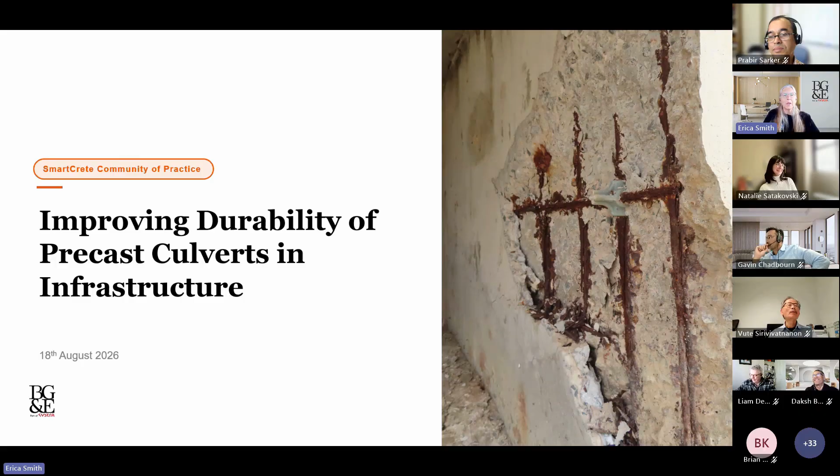So a few gory pictures and a little bit of background from me. The problem: precast concrete culverts form part of essential transport infrastructure. They often deteriorate in service, however, before their expected design life. Older concrete culverts were generally cast in situ, and many suffered from cracking and spalling due to lack of concrete cover, ingress of moisture, and other environmental aspects.

Newer precast concrete culverts are generally more robust and perform well, but there are still some reinforcement corrosion problems, particularly in the salt-affected areas of WA, which is where this project concentrated its effort. In addition, once you need to do some repairs, it's a little bit like putting a Band-Aid on it. Concrete patching or crack repairs can be quite successful in the areas you're looking at, but then other areas fail due to general dampness through porous concrete or lack of concrete cover.

So the causes of deterioration can be many and varied, and I'll go through some of those in my slides. But as I say, Curtin University is looking into some possible causes of that.

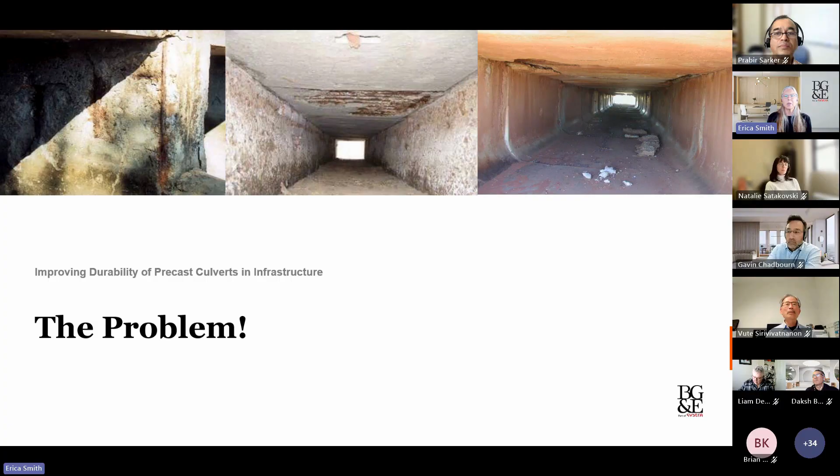BG&E's involvement: we value the opportunity to contribute to SmartCrete and the university research. We commenced this project back in 2021, forming the scope and the ideas behind what has emerged over the subsequent years. We're an industry partner on this collaboration, and basically what that means is we stump up some money for testing, transport, materials, those sorts of things. We contribute hours for asset management specialists, so that could be structural engineers, material specialists, technical officers. So it's an in-kind contribution.

And we also provide those valuable connections to what I would term real life. In this case, predominantly to Main Roads' Wheatbelt region in particular, but also some of the concrete manufacturers as well.

Before we get too far, I figured that we should make sure we're all on the same page regarding what is a reinforced concrete box culvert. Engineers aren't that... don't have a great way with words. We talk about a box. Well, it looks like a box, right? This is taken from Main Roads inspection guidelines and shows the various components of a box culvert.

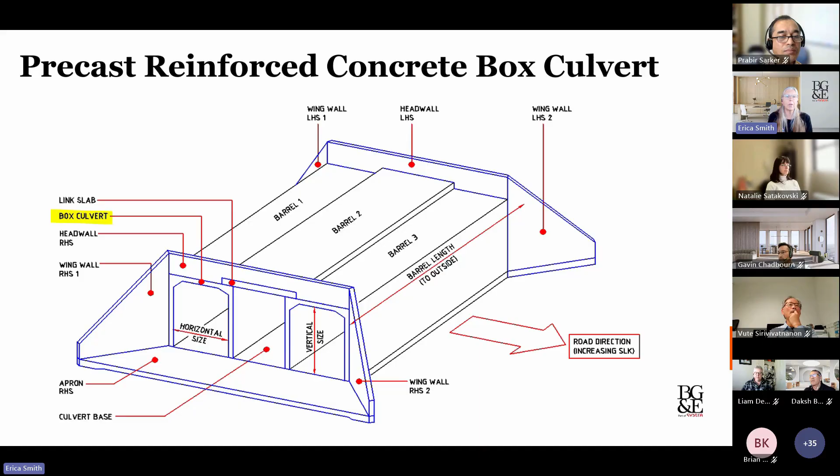The ones that we're talking about today and as part of the research are the precast reinforced box culverts. So there's barrels 1 to 3 here in this 3D visualization.

What is a culvert? It's a buried structure that transfers something. That something can be things like water, stock, pedestrians, or other things. And it carries something over the top, and again that could be anything like vehicles, trains, pedestrians, or whatever. It's also designed to safely resist the earth pressure.

In WA's world, a box culvert is defined as a structure having clear openings of less than or equal to 3 metres. If it gets bigger than that, they term it a bridge, and it's treated slightly differently in the vehicle permitting and asset management side of things for Main Roads WA. And obviously a box culvert is shaped like a box. Not too hard to understand.

Culverts are an important component of any road network. Compared to bridges, culverts are smaller and might be considered less critical. They're buried beneath the road embankment, often sight unseen. However, failure of culverts can be a hazard to traffic, and excessive settlement or collapse can result in closure of the network. So they still constitute an asset that is subject to deterioration, and they must be managed appropriately.

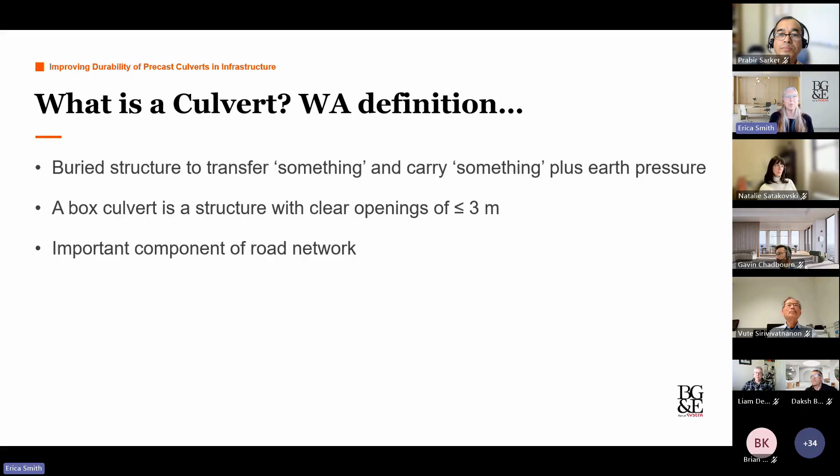The size of the problem - the state of WA is pretty big and has nearly 186,000 kilometres of local and state roads. Main Roads WA looks after about 19,000 kilometres of those, just over 10%. There are nearly 28,000 culverts managed by Main Roads, so we have some decent records on that within the state. That equates to about 1.5 culverts per kilometre on the Main Roads network, or if you flip it the other way, about 1 culvert every 680 metres.

Of those 28,000 odd culverts, 7,000 are what we're talking about today, which is precast boxes. So still a very large number, and that's just on the Main Roads network. We don't really have a good indication of the total number of culverts in WA, but it's obviously far higher than that, because you have culverts used for rail and roads managed by others, whether that's mining resource organisations, water corporation, local governments, and so on.

For Main Roads, because we've got a bit more information about them, the total investment in their culvert structures is considerable, and it's comparable in value to that for bridges. The proportion's likely to be higher for other asset owners because they generally have smaller structures in their bridge stock.

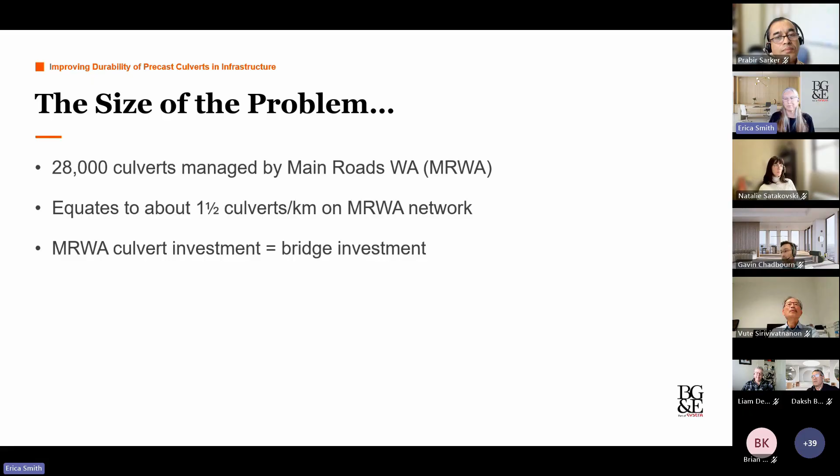Just having a look at some of those defects that I alluded to before. Defects in concrete are often related to lack of durability, resulting from composition of the concrete, poor placement practices, poor quality control, insufficient curing, or it could just be the environment, which is more aggressive in which it's placed.

Cracking - everyone recognises that reinforced concrete cracks, and there will be some cracking, but it's those cracks that are bigger than hairline that matter. Hairline is considered less than or equal to 0.1 of a mil. They may be considered harmless structurally, but we still need to look at those because they may open up and progressively spread to longer and wider cracks and then become a durability issue.

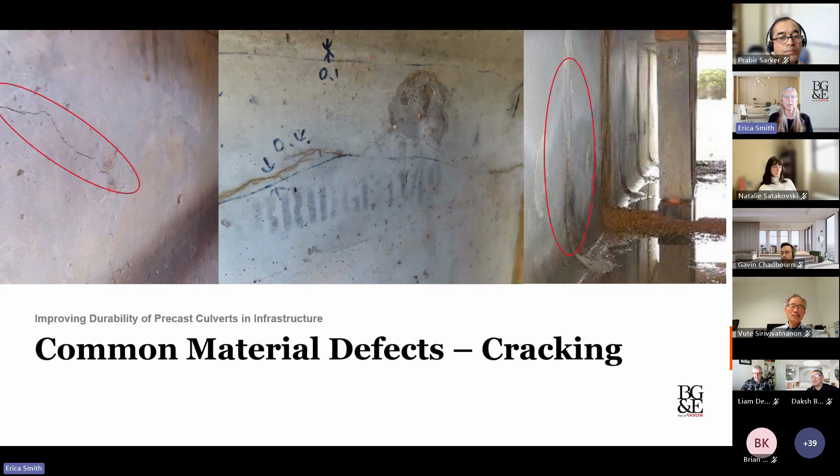Corrosion of reinforcement is a big issue, particularly in the saline environments of the state and the wheatbelt areas in particular. Concrete alkalinity protects the reinforcement from corrosion, but when moisture, air, and/or chloride ions above a certain concentration can penetrate through the concrete to the reinforcement, this protection breaks down and corrosion commences in its initial stages.

It may appear just as rust stains, as you can see on the left-hand photo here. But then the expansive nature of the advanced corrosion to the reinforcement is in the order of 4 to 6 times its original size. So what happens is you then get cracking, delamination, and ultimately spalling off of that concrete, and then you get a heavily corroded reinforcement that's no longer protected from the environment. These are some photos here of culverts throughout the state, predominantly in the wheatbelt and WA.

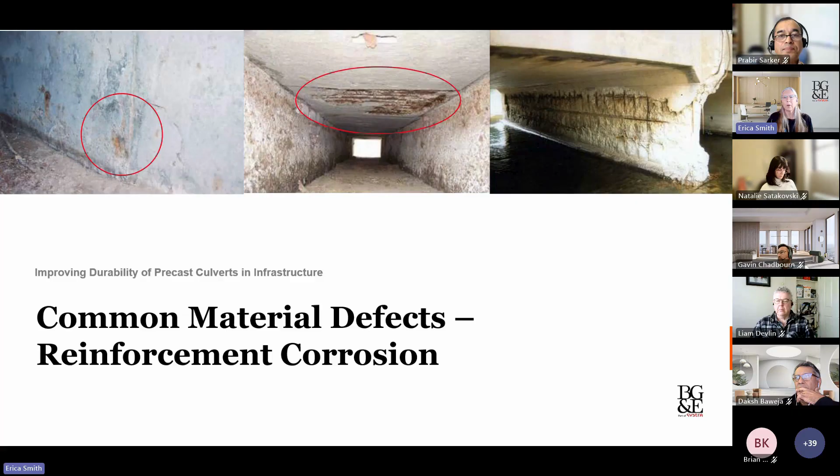Another one I wanted to show you was spalling. Spalling is just a fragment which has been detached from a larger concrete mass, and you can see a couple of examples here. It's usually a continuation of the corrosion process, and it represents a serious defect because it exposes the reinforcement, and you've now lost your cover. There are other material defects which I'm not going to go into a lot of detail today.

Things like delamination, where you have a discontinuity in the surface of the concrete, just before you get the spall. You can usually tell that you've got delamination by whacking it with a hammer, and then you get a hollow sound behind.

You can see areas of dampness, and that might be a sign that you've got an indication of moisture penetration through the concrete. It may eventually lead to corrosion of the steel. It may be nothing, but it should still be looked at.

Scaling is localized flaking or loss of surface of the concrete, usually to a small depth. That's prone in poorly finished or overworked concrete, where you have too many fines and not enough entrained air near the surface. It can be superficial and usually doesn't extend to the reinforcement, but it may again lead to reduction in overall durability because you've lost that cover concrete.

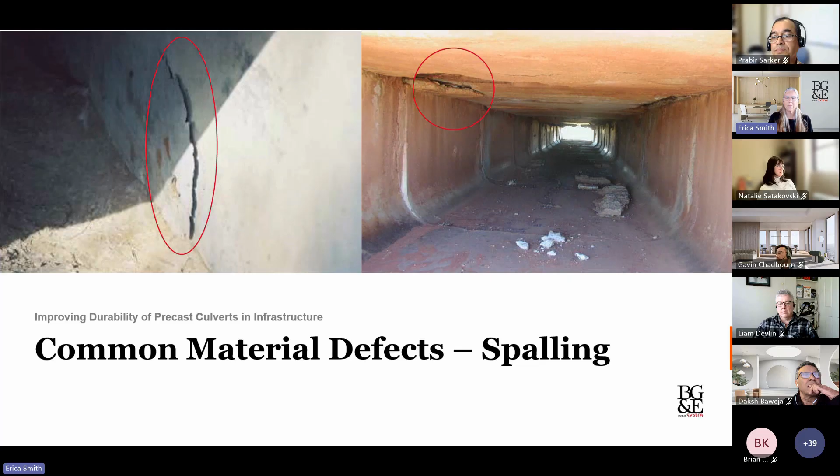Then we have some defects that are generally related to the culvert site rather than specifically the box culvert barrel itself -- things like scour, vegetation, debris, drainage, movement, settlement. These aren't really considered as part of this study at all, but loading has been. So loading is another thing that can cause defects.

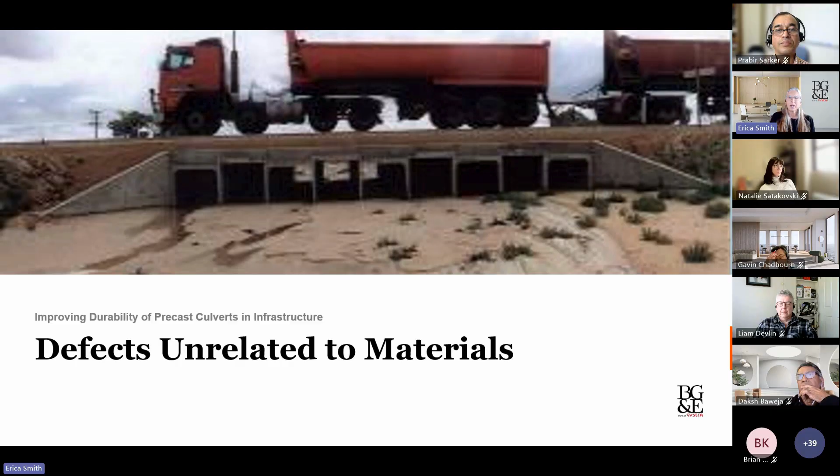During construction, it's important to make sure you don't overload a structure as you put the backfill in, but also in service. So impact overload at the slab edges, or where you have limited cover, are issues that may affect these precast box culverts. Comparing theoretical load carrying capacity to actual, as well as the failure patterns, is also being looked at by Curtin.

So that's it from me. Hopefully that helps to set the scene a little bit and explain the problem and the size of the problem. It's fairly large in WA and throughout the world in terms of culvert structures and durability.

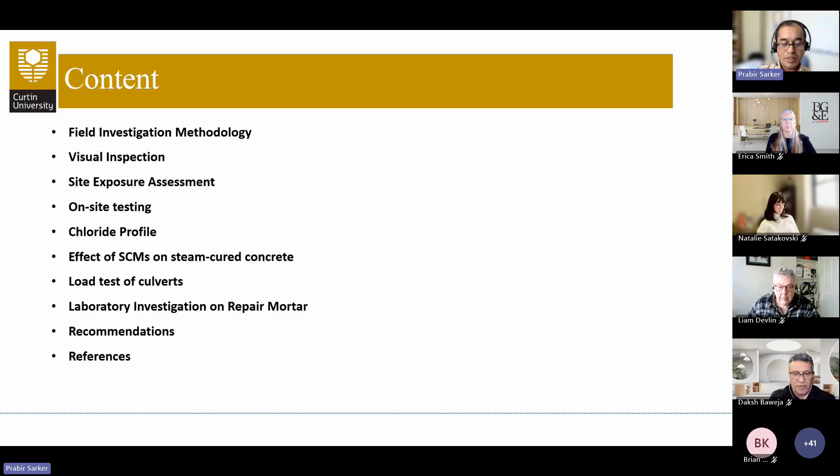So these were the subject of the 3 HDR students. I acknowledge the hard work of the students that have put on this project, and if I cannot answer some questions in detail, I will need to ask them. We have Atauz Zaman and Chinmoy here today. Shaugat is not around because Shaugat is traveling.

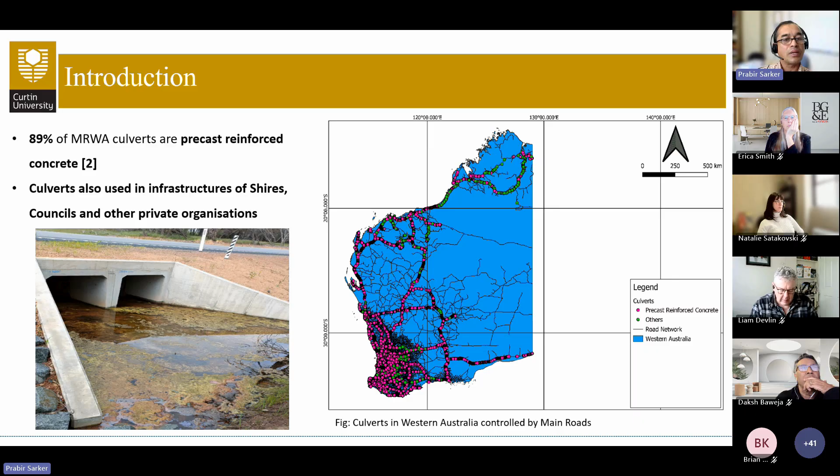The field investigation started with 1,400 visual inspection records that Main Roads Western Australia had, to understand the majority type of deteriorations, the common defects as Erica mentioned: corrosion, concrete spalling, delamination, erosion, and scaling.

From there, 53 culverts were identified with discussion with BG&E, and we observed the deterioration in more detail. We collected the level 1 inspection reports from Main Roads to look at more details into those.

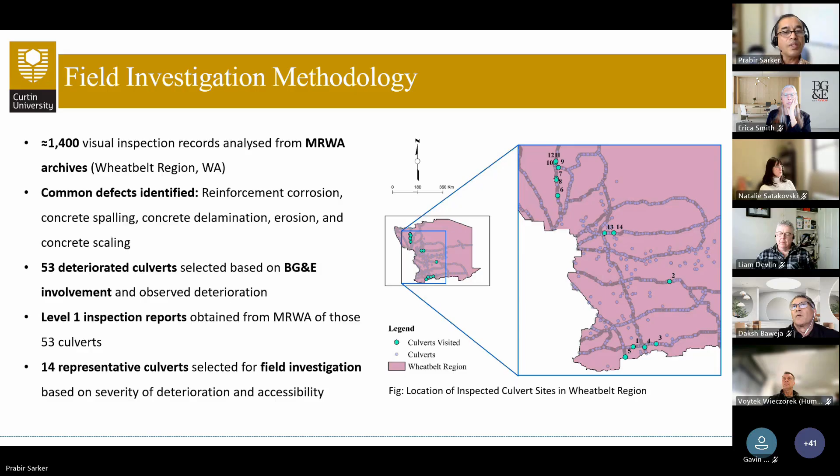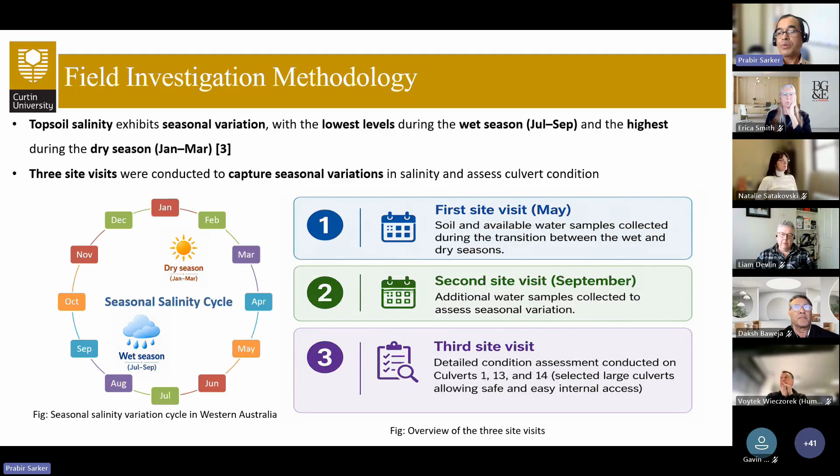So what we did is go to the site 3 times, because the water in the soil varies seasonally. We went once in May to collect soil and water samples and do visual inspection of the culverts. The second site visit was in September, and the third was done in a dry season on 3 culverts, 1, 13 and 14, to do detailed investigation using on-site testing and also to collect core samples to test in the laboratory.

Visual observation shows salt-tolerant plants at many sites, which is an indication of high salinity, because these plants thrive in high saline soils and waterlogged conditions.

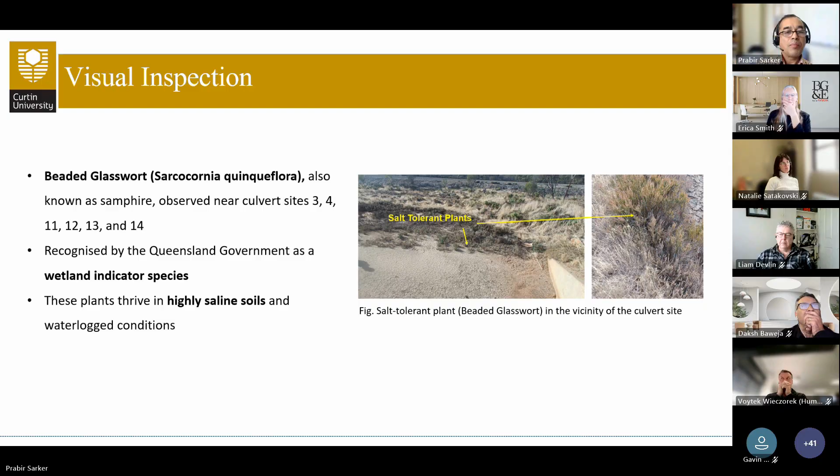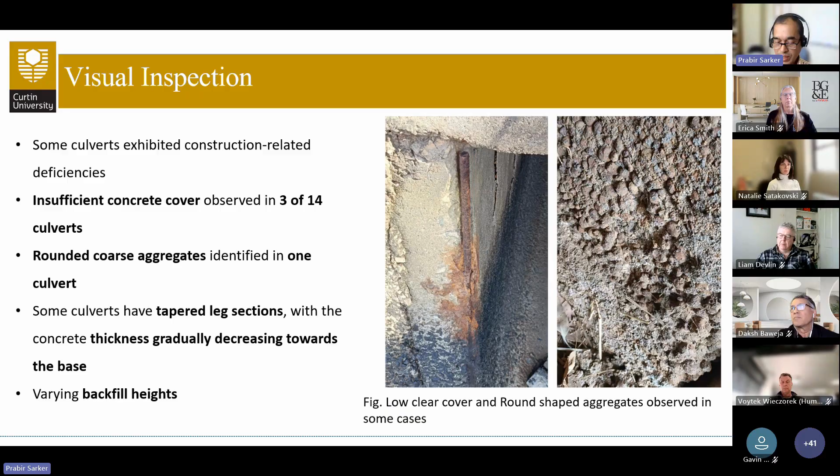Some culverts had tapered legs, tapered at the bottom, so the thickness of the culvert leg was high at the top but less at the bottom, gradually decreasing towards the base. Also the backfill heights in culverts varied; in some culverts backfill height was very small, which can affect the load distribution of traffic to the culvert.

This shows some of the deterioration that Erika already showed, so I will not go through this again. These are just photos taken from the inspection of the sites.

Now the site exposure assessment based on the test results of soil and water collected from the sites, using a pH meter and electrical conductivity meter. Soil pH ranged from 6 to 9, indicating an alkaline condition.

The WA government's industries and regional salinity classification recommends salinity classes: high for values from 58 to 114 millisiemens per meter, 115 to 228 indicates severely high saline, and extremely saline is higher than 228 millisiemens per meter. On the right-hand side diagram, we can see 7 sites out of 14 inspected categorized as extremely saline sites.

So we can see salinity, this is based on the electrical conductivity in millisiemens per meter. pH of the water ranged between 7 and 7.5, indicating alkaline condition as well. Water collected from the site was tested for electrical conductivity, ranging from 2,230 to 8,600 millisiemens per meter, showing again extreme saline condition. Both soil and water tests indicated extremely high salinity in almost half of the sites we inspected.

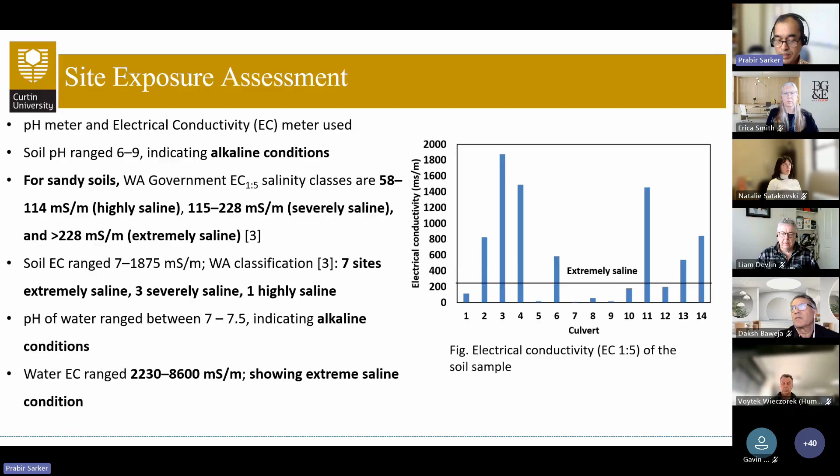Soil and water samples were also tested for sulfate, magnesium, and chloride contents in the chem center. The results were used to classify the exposure condition according to AS 5100.5, and it was found that 9 out of the 14 culvert sites were classified as exposure class C, which is C1 and C2, as we can see on the right hand side diagram.

Water with up to 6,500 ppm sulfate and up to over 3,000 ppm magnesium was found. Chloride concentration was very high, up to 83,700 ppm, which is approximately 4.5 times the chloride content of seawater. So some of the sites had very aggressive conditions in terms of sulfate, magnesium, and chloride content.

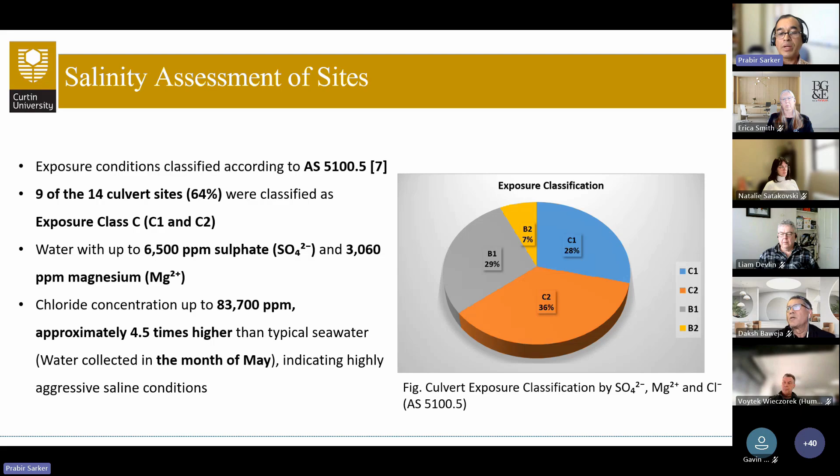Then in the detailed third inspection, we went to the site to do some tests for carbonation and electrical resistivity. The carbonation depth was measured on core samples, which were collected from the good areas of the legs where there was no obvious deterioration, because core samples couldn't be collected where there was already spalling or delamination. Carbonation depth was tested by spraying 1% phenolphthalein solution.

Higher carbonation depth was found at the top of the culvert legs, and minimal carbonation was found at the bottom of the culverts. The reason is the bottom part had high moisture saturation at the base, which limited carbon dioxide ingress.

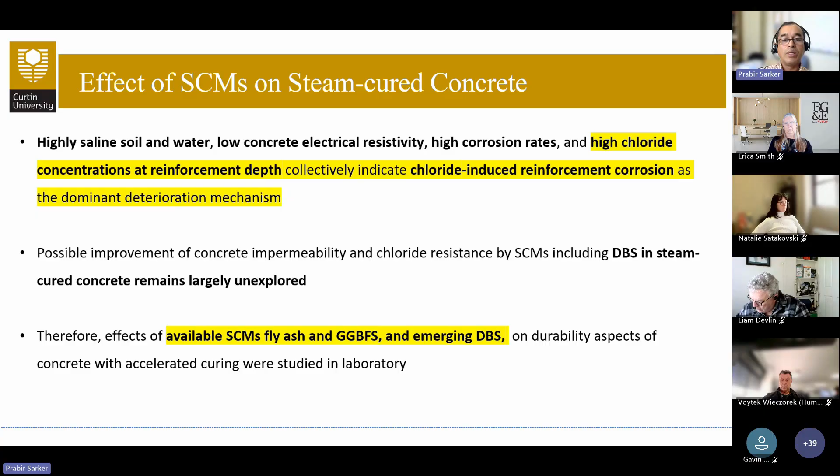So we looked at the effect of some SCMs like fly ash, GGBFS, and one of the new emerging SCMs, DBS from lithium refinery residue. Fly ash is going to be scarce in the future due to the closure of thermal power plants, so DBS can be considered an alternative for the future. So we included DBS in this study.

Some of the tests we did were accelerated corrosion test, rapid chloride penetrability test, and chloride diffusion test, to see the effect of these SCMs on steam cured concrete commonly used for precast concrete like culverts. This shows some photos, and this is the chloride diffusion test setup.

We limited the percentage of SCM in the concrete for the test to 20% cement replacement, considering that for precast concrete we need some minimum strength development in 1 day for demolding, and also good strength development for transportation of the units to the site. So basically, the early age strength development of concrete was the consideration for limiting SCM content to 20%.

So the results, very briefly: we have not shown all results here, but the details can be found in some of our publications which are publicly available. Basically, what was found is that fly ash and DBS were more effective compared to GGBFS at this 20% replacement against chloride ingress and reinforcement corrosion, from the accelerated corrosion tests.

Next, we move to the load testing of some culverts. The reason for this was to investigate the effect of these deteriorations at the site on the load capacity of existing culverts. We wanted to develop a numerical method that can predict the behavior of culvert structures, including the load deflection response and also the failure load.

So that this deterioration, like estimated section loss by deterioration and estimated reinforcement loss by corrosion, can be included in the numerical analysis to predict the load capacity of existing structures.

So this needs validation of the numerical method by some test results. We collected some new culverts, and we were fortunate to get two old culverts from main road sites, and we tested those culverts in the lab. This shows the testing of the culvert according to the Australian standard.

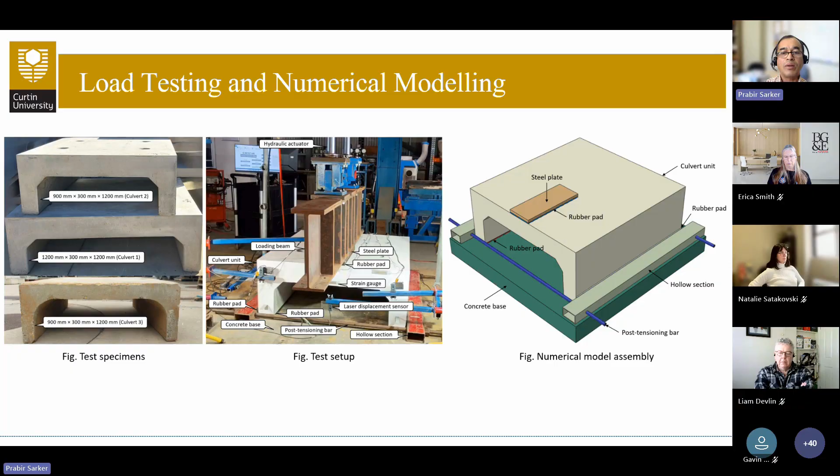It shows some simulation by finite element analysis using the Abaqus software. A model has been developed that can predict the load deflection response and ultimate capacities with the crack pattern and failure modes reasonably well.

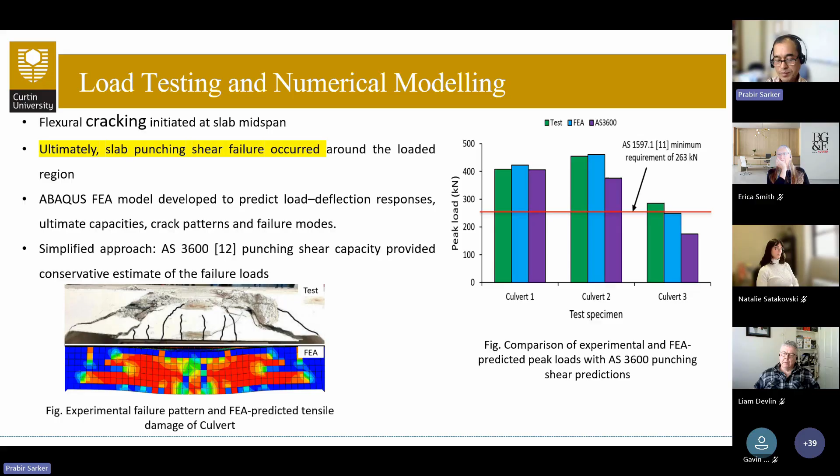Next, we have looked at the use of repair materials, mortars, to repair some of these deteriorations, and to see if it could be a way to extend the service life of these culverts that are being deteriorated. So we investigated the mechanical properties, bond strength, and shrinkage behavior of some polymer modified fiber reinforced mortar in the lab.

Some of the mortars trialed in the lab were cement based mortar with a water to binder ratio, water to cement ratio of 0.35, and a liquid styrene butadiene rubber SBR polymer was added to it, and also a micro synthetic polypropylene fiber was added. A high range water reducer was also used.

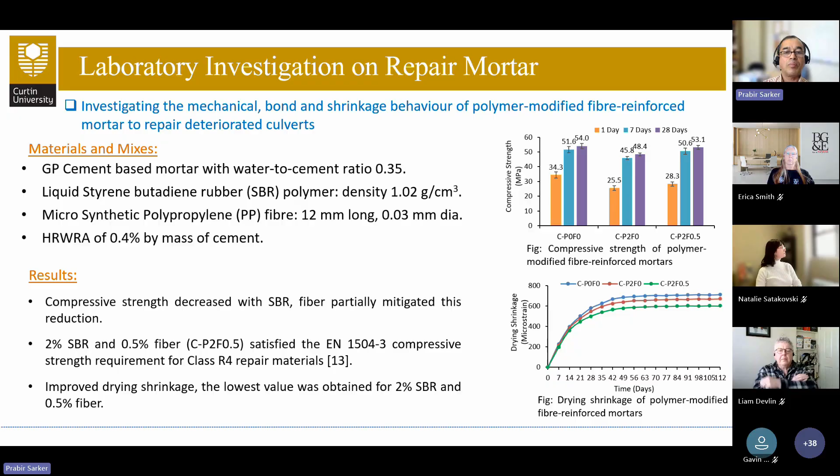That also improved the drying shrinkage, which is another very important parameter required for repair mortar, because high shrinkage will produce cracks at the early age of the repair, which may not be very effective. Then we also looked at some of the commercial mortars, structural mortars available in the market.

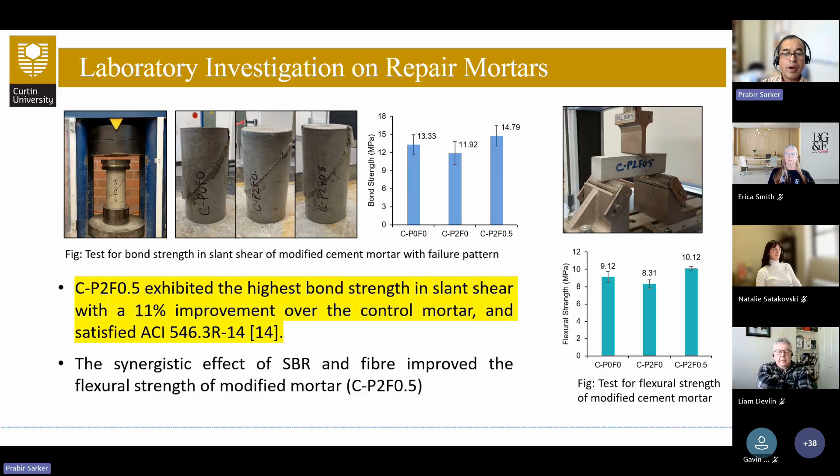This is still the mortar that we produced in the lab. What we see here is that bond strength and flexural strength both actually increased by the combined use of the SBR and the fiber.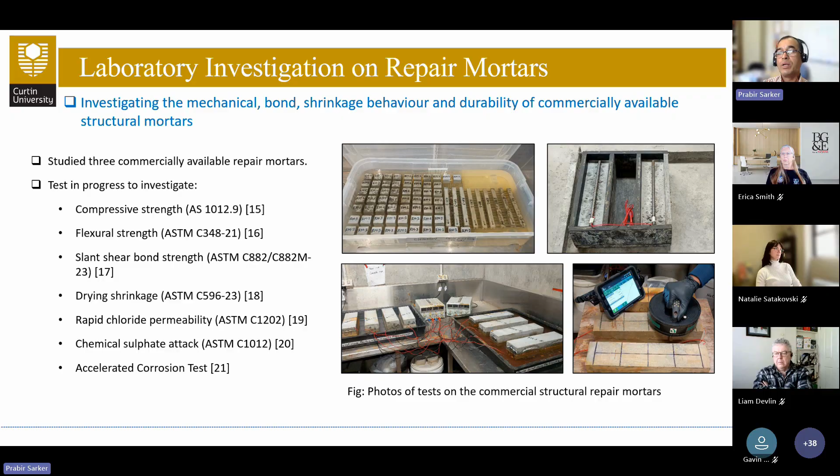Hopefully that will give some comparison which will be helpful to select commercially available mortars for repair of the culverts. So finally, we have presented briefly some of the results, not all of them, but the detailed results can be found in some of our publications.

If we draw some recommendations for durability improvement based on this study, from the physical observation of the culverts, I found that some of the culverts are tapered, and it has the lowest thickness at the bottom of the legs. We have seen that that is also the most critical location in terms of soil and water salinity and high corrosion activity.

Probably these tapered legs reduce the cross section and reduce the cover depth to the reinforcement, so that could be considered at the construction stage, whether this tapered leg can be avoided, which may increase the cover to the reinforcement and improve the overall durability of the culvert. And use of supplementary cementitious materials.

We have seen that these supplementary cementitious materials for concrete subjected to accelerated curing improved the permeability and chloride diffusion. That is probably not used as much currently in the production of the culvert, so that can also be considered to improve the material properties of the concrete, which may improve the durability of the culverts.

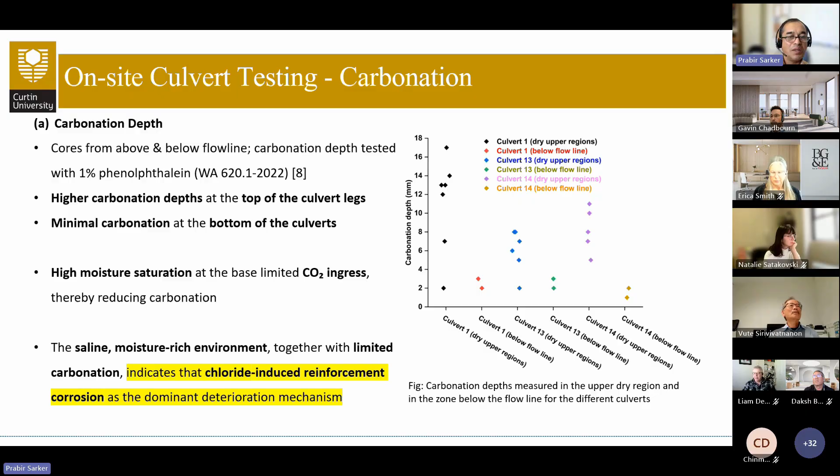Yes, Gavin. Yeah, so the sulfate was found very high as well. Actually, the student who worked on it, Shogat, is not available here today, he could have answered in more detail. But yes, sulfate from the site, from the soil and water, was tested in ChemCentre together with magnesium and chloride content. I think sulfate content of the core concrete was also tested. And we are doing some tests on the sulfate exposure of the concrete samples in the lab, using new concrete with different types of SCMs to look at the sulfate resistance, subjected to accelerated heat curing.

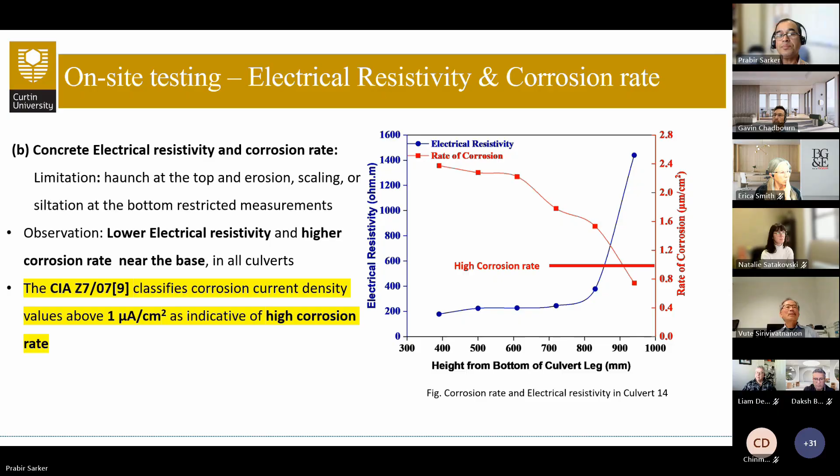Very good. Another couple of questions in the chat, Prabir. One again from Liam Devlin - did you measure the air content of the concrete? No, we haven't measured air content.

Liam, do you mean air content of the concrete that we cast in the lab, or air content of the culvert concrete? Of the repair mortars that you tested in the lab. And the reason I asked the question is that SBR is known to cause a problem with air entrainment. I did a lot of work with it in marine concretes many years ago, and that was one of the big problems they had.

Right, no, thank you for clarifying the question, Liam. So I again ask Chinmoy - did we do this air content test? No, I haven't done this test. But also the SBR has problems with air content. When I did my compressive strength test and analysis, I found there were some voids. But when I added the fiber, it was reduced compared to when it was only the SBR - it had more air content, but when fiber was added, it was mitigated.

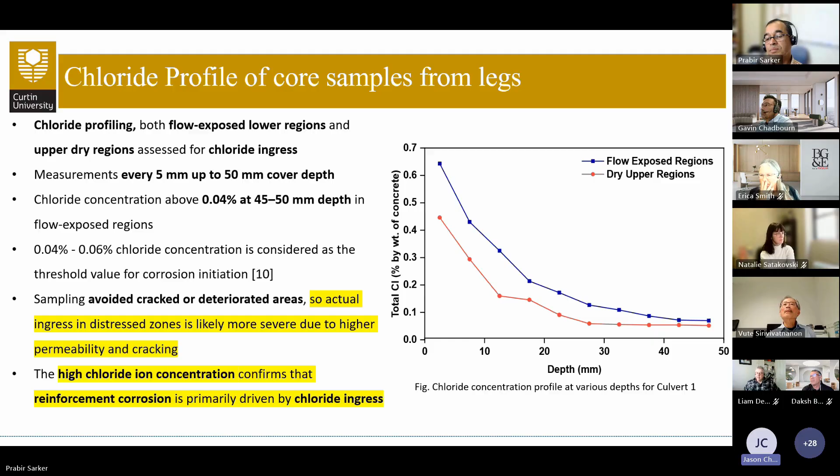Up to certainly 50% slag is able to be done, and is done, in culverts - I've seen it done in culverts. We've certainly done it on tunnel lining segments and the like for infrastructure work. So yeah, that was my suggestion in the comments - taking the slag up to 50% or higher is quite reasonable because it doesn't seem to impact the early strength very much.

When you're heat curing - yeah, I agree very much with you, Jason, especially looking at the analysis of the water and so forth. But just a question on whether they are actually available in the marketplace, I guess.